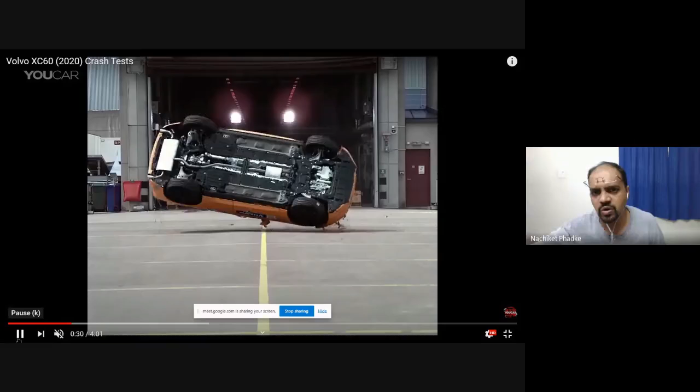Now let's go ahead. I'll just create some interest in you guys. This is a slow-mo, and see what is happening inside. Okay. So very little deformation whenever it touches ground. And this is like three times it is getting rolled over. It's not just one time. So it is not getting deformed. It is rolling over, and the occupants are safe.

Can you see this? It's just juggling around, and they are having their seat belts on, and occupants are safe. So even if it lands on its head, it's still intact. That is how strong it is. That is where the biggest strength of Volvo lies. Okay, so there are some bruises here and there. Some things are deforming. The door mirror is coming off, and there are a few things happening. May not be structural. The headlight is gone, burst. Everything is happening, but inside it is not particularly dangerous. Okay, agree?

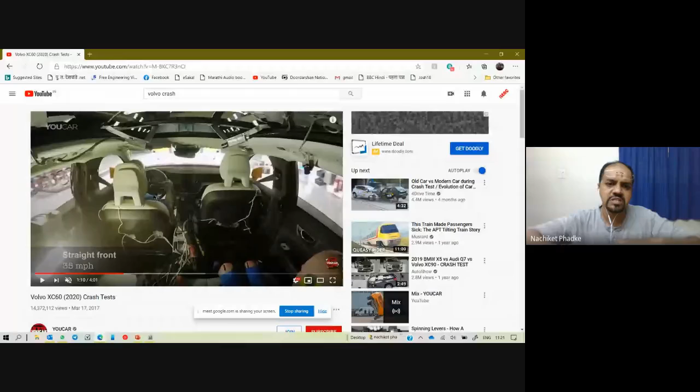Now let me just zoom out this window, and I'll just create another screen here. Okay. Now what do you have to watch here? This is a frontal impact, and it is a straight front. That means it is going to get hit directly onto a rigid wall with the full fascia in contact with the wall. There are going to be many types of frontal impacts. This is the least severe because the vehicle will absorb more energy. So now let's watch what is happening. Now I'll just explain in slow motion.

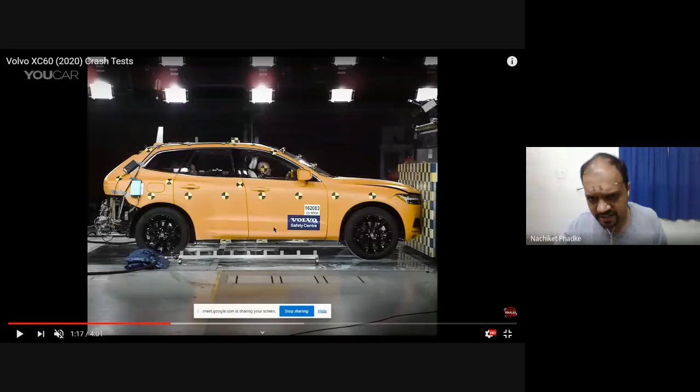Now the important aspect here, which you guys as mechanical and automobile engineers have to look at, is this particular test is a one-time test. Clear? Everyone understands that you are not supposed to drive a vehicle once it is in a frontal crash or a rollover. You are supposed to tow it away. The second aspect is this may happen with one car. So you're not going to meet it with another car. You may just directly hit a wall or a tree or somewhere else when you are driving alone. That is all possible.

Now, the important aspect here is the occupant should be safe. That's one part. The second part is there should be enough strength in this particular zone. You can see this particular zone. There has to be enough strength in this zone so that the door should open. After impact, the hinges, we all know hinges are going to be here, correct? So after impact, the hinges should be intact. If hinges are not coaxial, the door will not open.

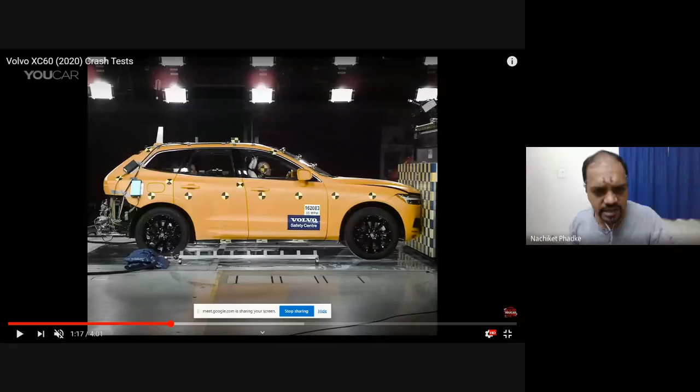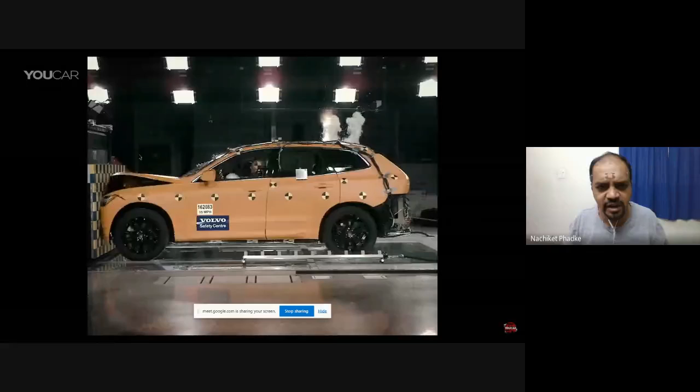Can you see this? It's tremendously steady. It is tremendously stiff. And that is why everyone says that Volvos are safe, with 5-star safety. Okay. It is tremendously safe. You can see the speed. You can understand what will happen at this speed in a Maruti, for example. I'm a pretty bad critic of Maruti cars because they are just crap for sure.

Okay, so this is what safety is, vehicle safety. It has to be taken seriously because accidents can happen with your mistake or without your mistake. It can be somebody else's mistake, but accidents are always going to happen.

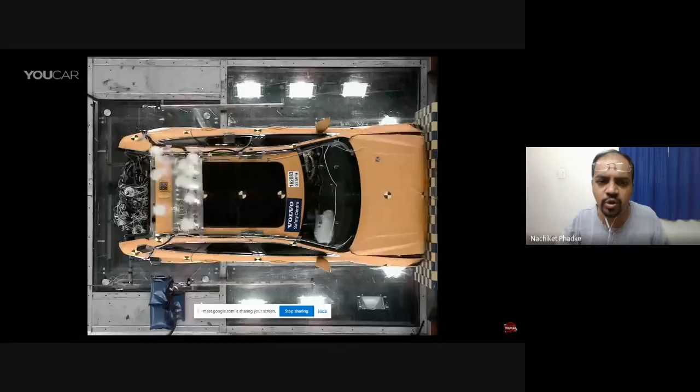Okay, so here you can see the accelerometers. There are going to be sensors, and they're measuring many things: what happens to the engine, what happens to the drivetrain, what happens to the non-structural elements, what happens to the wheel, what happens to the front bumper. All these things they are going to understand. Even the windshield takes a lot of load. The windshield also absorbs a lot of load.

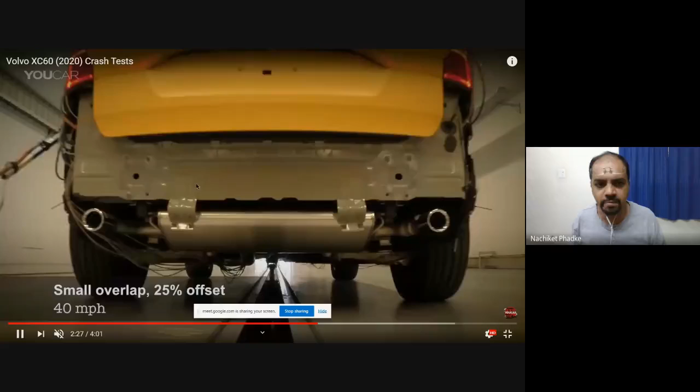Clear? So we talked about two types of dynamic analysis. So now this is the word which you have to write: dynamic analysis or dynamic load. So write it down in your notebook. Definition of a dynamic load. Through this video we are supposed to learn something.

Dynamic load. The definition of dynamic load is very simple. Let me write it down for you guys in a presentation. This is my company presentation, but for you guys I have converted it into training material. What is a dynamic load? By definition it is very, very simple. All of you understand strength of materials and design of machine elements. You guys are from third year or final year engineering background, right?

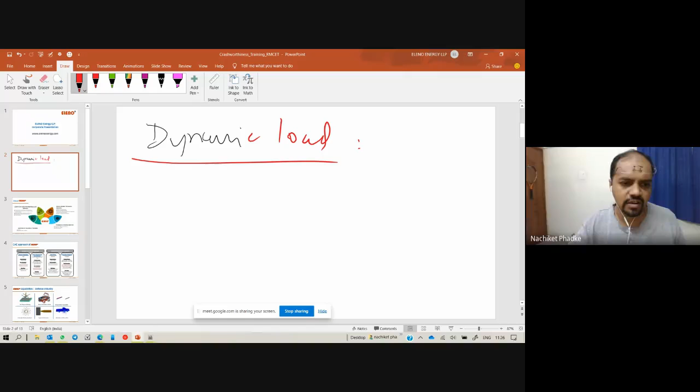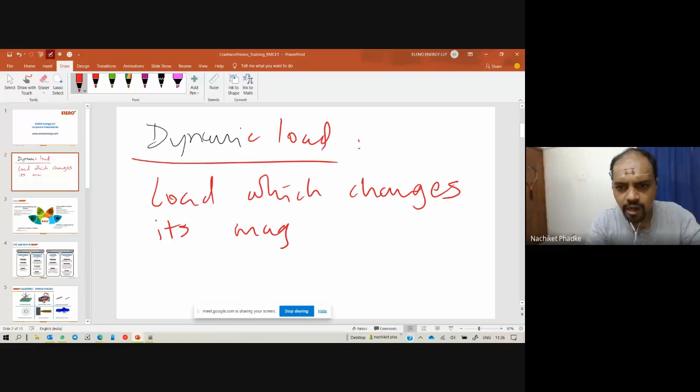So a dynamic load is a load which changes its magnitude and/or direction with respect to time.

Can you write this down, guys? Definition of a dynamic load. Once you are done writing, type done in the chat box quickly. Load which changes its magnitude and/or direction with respect to time. This is important for crashworthiness design. And we are also going to come to what the types of designs are.

Now, as you are understanding, type done once you are done writing. I want you to write it down. Don't take screenshots. I will share this presentation with you. Screenshots have no meaning. You will never go back to a screenshot and learn from it, but you will always learn from your books, because it's your own writing.

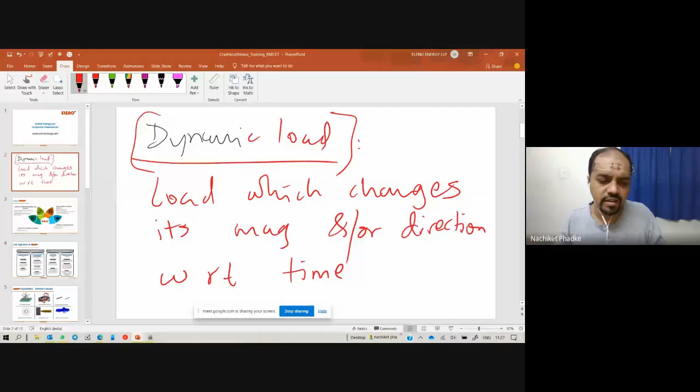Okay, so write down what a dynamic load is. It is nothing but a load which changes its magnitude and/or direction with respect to time. Understood? Now let's understand through a simple example what exactly a dynamic load is. I'll take a very simple example for you guys.

Let's imagine you have a shaft. The shaft is supported in bearings, so it is a fixed type of beam support, correct? When the shaft is in the bearing, it is a fixed type of beam. It is not a cantilever beam, it is not a simply supported beam, because bearings are supposed to carry bending moment. So there is going to be a maximum bending moment at the support.

There is no resistance to the shaft; it is freely rotating about itself. No resistance, no torque, nothing. And I attach a pulley on this freely rotating shaft with a mass of, let's say, 300 kilograms. So the mass of this pulley is 300 kilograms.

It is a perfectly balanced pulley, nothing imbalanced in this, and we are having rotation at, let's say, I'll not say omega, but let's imagine it is rotating at 3000 rpm without any load. So how are you going to analyze this shaft? It's a pure static load. Am I right, guys? It is a pure static load, because load is not changing its direction, it is not changing its magnitude. The magnitude is 300 kilogram multiplied by 9.81. That's the magnitude of force, and direction is downward, so it is not changing direction, not changing magnitude. That's why we can call it a static load.

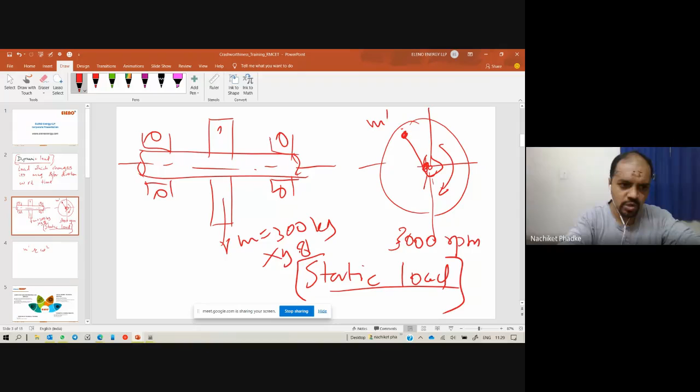Now if we apply some kind of an imbalance here, which is m dash on this pulley somewhere here, this imbalance is going to create what? M dash r omega square, correct? So there will be an imbalance here, which is m dash r omega square. This r is going to be the radius between center and the mass. That's the distance we are going to measure. And what is happening? This is constant because m dash you are not changing, but the direction of load is continuously changing. It is continuously alternating, right?

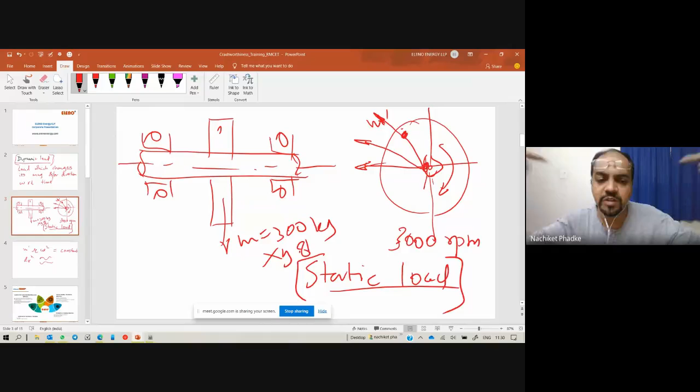So what is happening to the bearing? Once it is going to get pulled in this direction, the other time it is going to get pulled in the other direction, and so on. So there is going to be a continuous centrifugal force which is going to pull the bearing in all directions as time changes. And this is something which we'll be calling a dynamic load, because it is not changing magnitude, but as per definition it is changing direction.

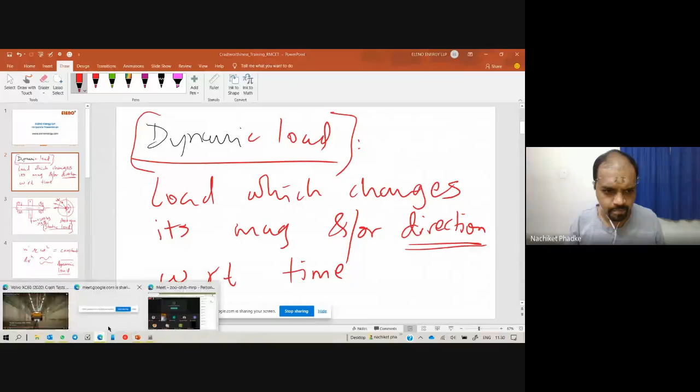Are you clear with this particular example, guys? Type in clear if you are clear with this example, so that I understand. Or if you have questions, just type in the message box. Okay, Suraj says clear, Chinmay says clear, Prathamesh says clear, Aniket says clear.

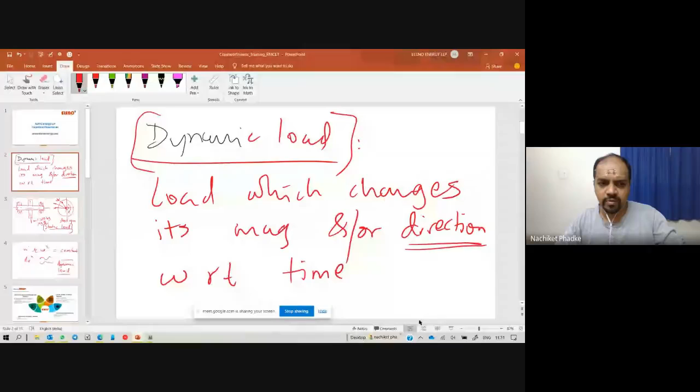Clear about the dynamic loading concept. So a load that changes its direction or magnitude with respect to time will be called a dynamic load. There are going to be 4 types of dynamic loads in industry. I'm going to talk you through the dynamic load in the industry with 4 domains. The first domain is what we are discussing today, crashworthiness. That's the first domain. The second domain is impact.

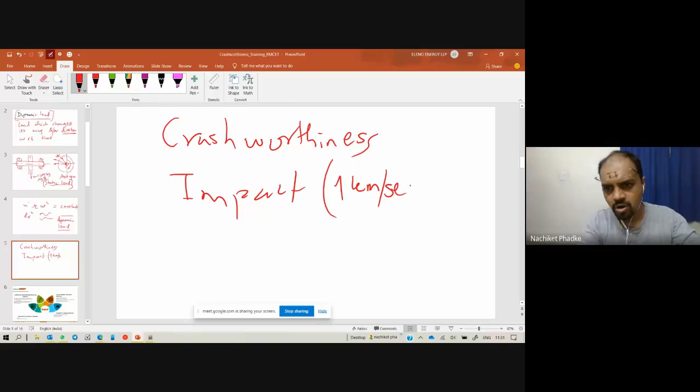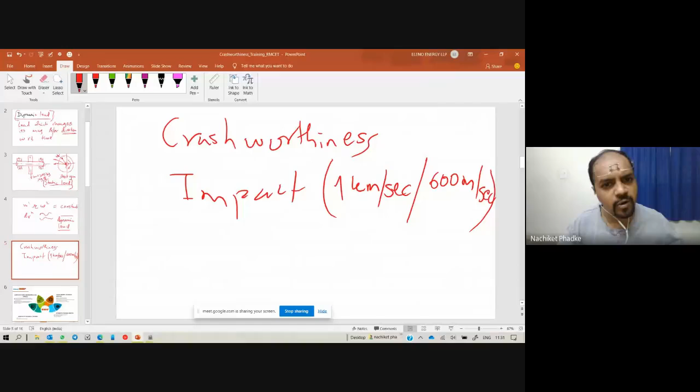When I say impact, it is at, let's say, 1 kilometer per second or 600 meter per second. I'm talking about high speed impact in the event of explosives, missiles, bullets. I'm talking about defense. So first of all, we are talking about automotive. The second thing we are talking about is defense. We are talking about domains.

The third type of application for explicit dynamic analysis is drop test for household equipment. So let's imagine a hair dryer, mobile phone, this mouse, this digital pen, or household equipment that may get dropped in transportation, like washing machines, dishwashers, or microwave ovens. They go under drop test. Everyone, Samsung, LG, Whirlpool, uses LS-Dyna for their drop test analysis, impact analysis or G loading analysis.

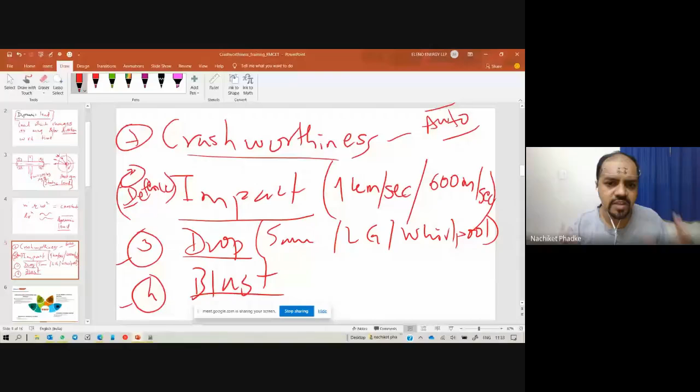And the fourth type is blast, which is a shockwave propagation phenomenon, happens in a millisecond, 1, 2, 3 milliseconds, it's all done. So this is what is causing us to actually understand the explicit dynamic domain. There is a tremendous shortage of resources for crashworthiness, for impact, for drop, and for blast. Take my word. There is a tremendous engineering talent shortage.

Engineers are talented, but they are not having skills. They may be having skills, but they are not aligned to the product. They may be aligned to the product, but they are not having exposure to the software tools. All these things are causing a lot of problems in the industry. There are tremendous opportunities, but we are not able to cater. Reason being, we are not good in the basics of engineering. That is the first reason. The second reason is we are not getting exposed to the newest technology. And the third reason is we are not focusing ourselves on a specific niche. The word is niche.

This is analogous to specialists, super specialists in the medical domain. If you go to any medical field, there are going to be super specialty hospitals. So if there is a problem which is very intricate, very detailed, you need a super specialist to solve that problem. That is something we all should strive for. And my next point about this is subject matter technical expert as your goal.

Okay, imagine. So let's talk about this. I will give you time to ask questions. Let's talk about this in 1 minute, and then you can ask me questions.

Subject matter technical expert. What is it? Who is this guy? This guy is a go-to guy who is going to solve your problem in a specific matter, in a specific subject, not a generalist. Okay, not a general practitioner. He is a super specialist in a particular subject. So you cannot be a super specialist in first year, second year, third year, even 5th, 6th, 10 years.

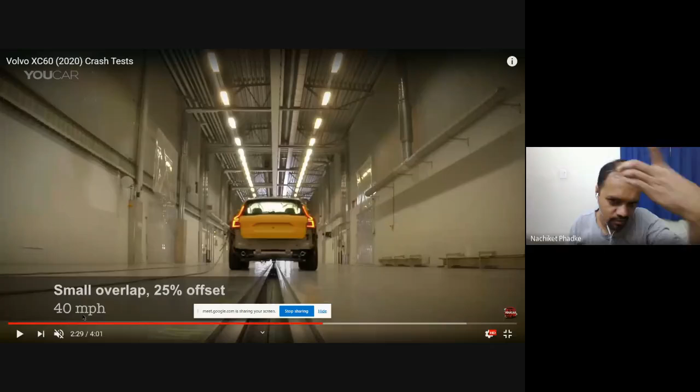I will read out. This is a small overlap, 25% offset at 40 miles per hour. So 40 miles per hour is 64 kilometers per hour impact. Okay, so 1.6 kilometers is 1 mile. So this is almost 64 kilometers per hour impact. Okay, and this is a small overlap. Small overlap is worst. Worst in the sense, you have a driver side.

Let's say you are a driver, and there is going to be oncoming traffic, and this is a top view. This is a full head-on collision. This is not very severe, okay, because the other car is also going to absorb energy. This is 40% offset, and this is 25% offset. You can see my hands, right? So this 25% offset leads to severe injuries.

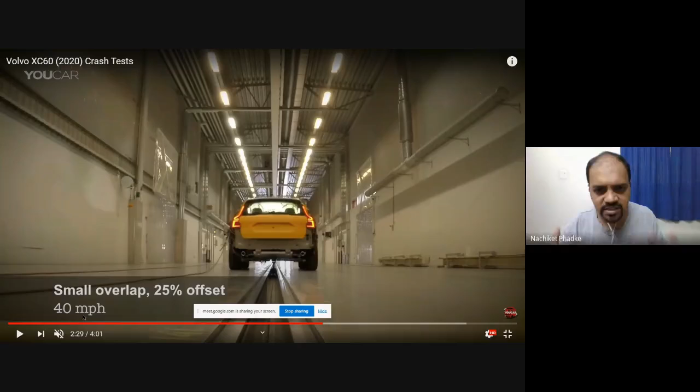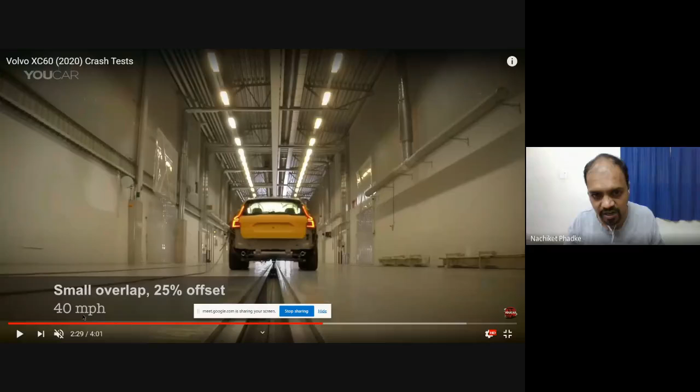There are going to be cases where the dead body could not actually be extracted out of the car. You have to cut the car altogether, and then you have to extract the dead body. That's the severity of a frontal impact. Okay, so let's see what is happening with a small overlap. Okay, this is called a sled, and you can see what is happening.

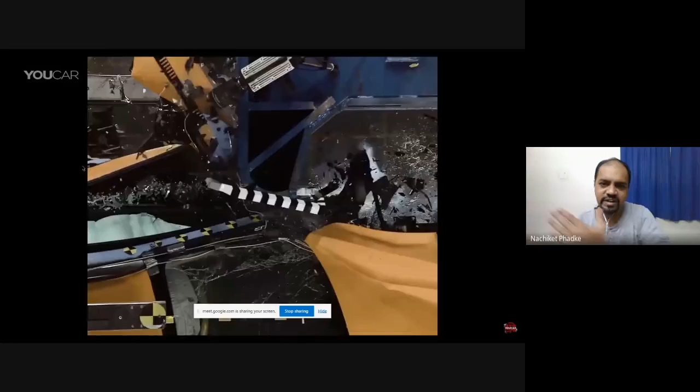It's a rigid impact, and can you see this? It's like the vehicle flowing as a fluid, and it is getting away from the barrier. Now let's see the top view. Let's see the occupant. What happens to the occupant? Can you see the A pillar, guys? It's not deforming much. There is a good amount of occupant space, and this is Volvo.

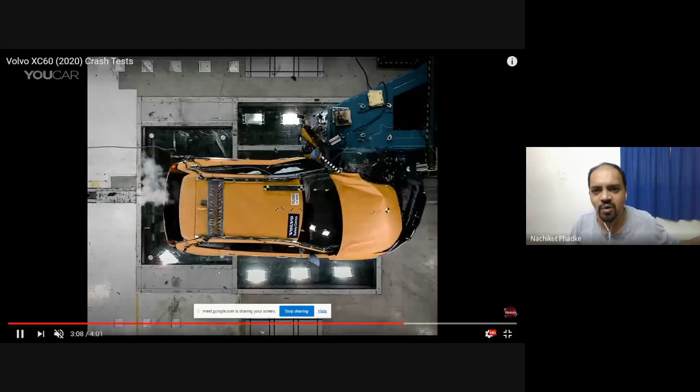Okay, so there has to be an occupant. The front wheel had just sheared off. It's out of its way. Can you see this? The wheel is not there. It just came out. Only 3 wheels are there. The 4th wheel is not there. And okay, so I will replay the last 5 seconds. You have to watch for the seat belt. Guys, be careful and watch what happens to the seat belt. It automatically gets pulled. Okay, that is called a pre-tensioner. So watch it carefully.

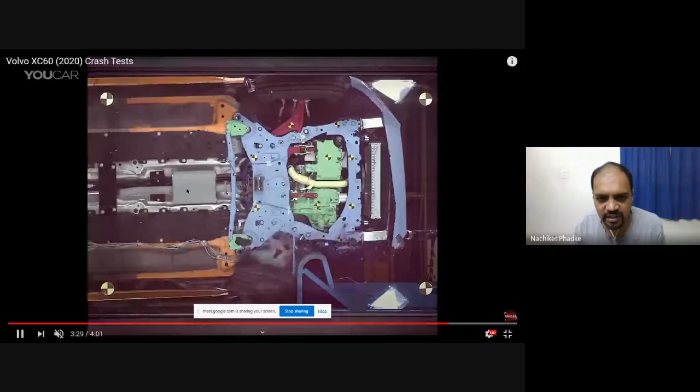Yes, can you see this? I'll play it again. Watch it carefully. The belt gets pulled, and that is to make sure the occupant is not moving around. The occupant is exactly in the position the vehicle wants it to be for a frontal impact. Okay, and the wheel sheared off, everything sheared off, no structure is able to withstand the load, and the vehicle just flows, and it is still stable.

Nothing happening. Can you see the amount of forces coming on the A pillar? The A pillar is so thick. So I will give you a very, very important assignment. Guys, are you listening to me? Type in L if you are listening to me. You have to go on road and write down the assignment.

Okay, the safest cars in India right now, there are 3 cars, I will say 5-star rated Global NCAP cars. The first at the top is the Mahindra XUV 300. The second 5-star car is Tata Nexon, and the third 5-star car is Tata Altroz. No other car is 5-star. Okay, so these 3 are the homegrown 5-star cars.

Now you have to differentiate by looking at the A pillars of any Maruti car. Okay, any Maruti or Toyota vehicle, the A pillar is what we saw near the driver, and see these 5-star rated cars, maybe XUV 300 or Nexon. Look at the A pillars of these 2 cars.

Okay, the 5-star cars, you will feel the difference by just looking at it. There will be a tremendous chunk of A pillars in front of you, and the reason is this test, the test which we saw right now. Small overlap, because this is a global NCAP test. This is a 25% offset at 64 km/h. Passenger should have no injury at all. That's the test, and that's why the vehicle is designed according to the test which it is going to undergo.

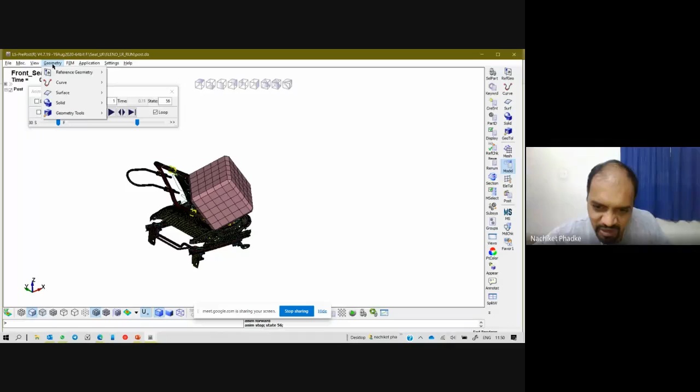What you can do using LS-PrePost: you can create geometry, very simple geometry. Okay, I'm not talking about a CAD tool, very simple geometry. You can open IGS and STEP files for free, and you can mesh those IGS and STEP files for free. So you can do meshing using LS-PrePost for free. You don't need any licensing, nothing. Clear, guys? Can you do that?

So I'm giving you a lot of things. You have to be very, very busy with your pen and paper. Okay, so LS-PrePost, that is what you have to search for. Can you do that? So search for that, and later you can actually see it or actually use it.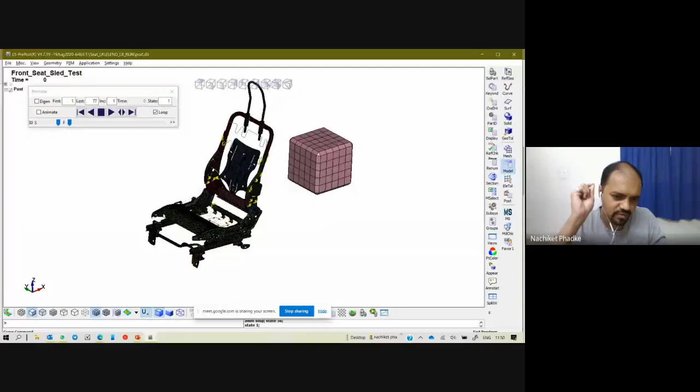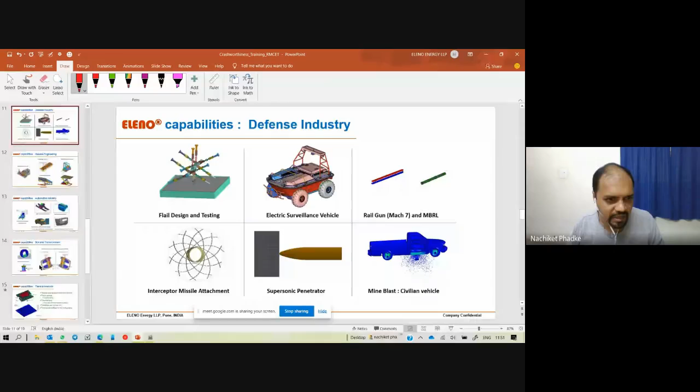Fine. Now let's understand, with regards to this particular presentation, the applications of crashworthiness, the applications of the explicit dynamic domain. So I will just show you some applications right now. Let me check if I have another presentation. Yeah, okay, so this is a bus rollover presentation. I just wanted to show you some animations, but anyway, I will show you an animation here.

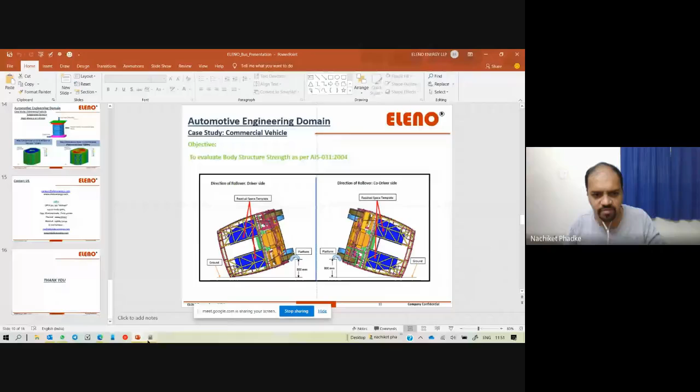Yes, so you can see a vehicle seat. This is a car seat. This is not any company seat. This is from GrabCAD. You all know GrabCAD, right? I'll just type in GrabCAD in the comment box, and I think it will be easy for you to check. Okay, I've just put the name, grabcad.com. It's a free site where freelancers upload their designs, and you can download them for free.

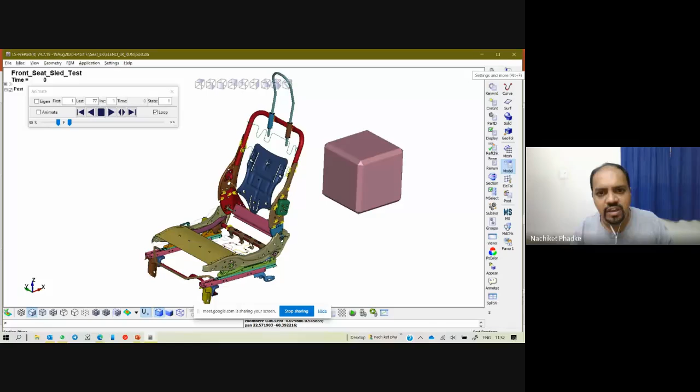So this seat is not any company seat. I'm not allowed to show any company presentations or company designs here. This is a free seat available on GrabCAD. What we did is we meshed this seat using nodes and elements. So you can see it here. Can you see this? You can see the meshing.

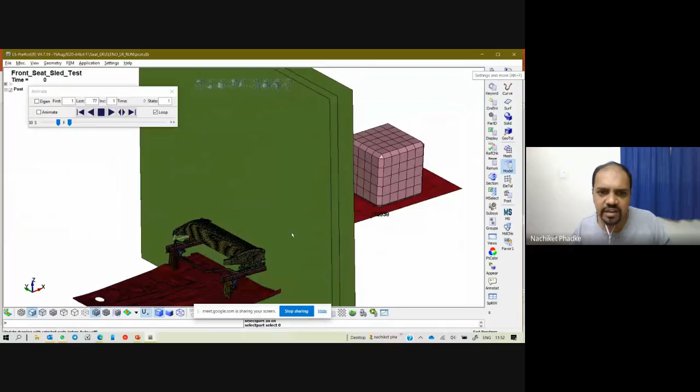There are many holes available. This is a track. There are connections. There are wires being defined. There is connectivity done. This is a plastic panel. This is a head restraint rod. This is a luggage block. So I'll just show you what it is. What is this test? This test is called the luggage retention test.

Can you write it down? I will also write it here. The name of the test is luggage retention test, LR, and it is as per ECE, that is Economic Commission of Europe, ECE regulation R17. You can search this regulation. This regulation is available free of cost to everyone.

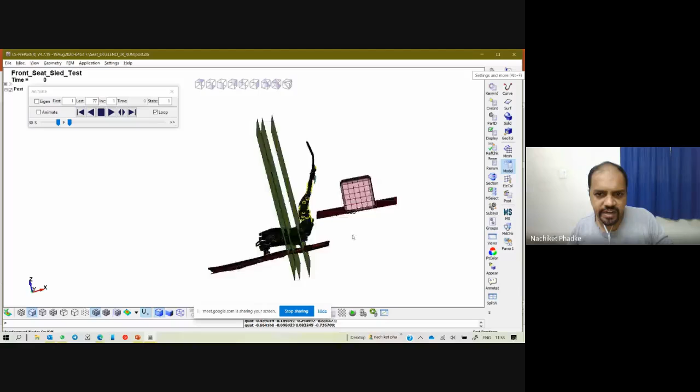So this luggage retention test is also called frontal impact unladen. Unladen means nobody is sitting in the seat and still we are doing a test. So what is happening in this test? There is a luggage block. The block is not moving. The block is stationary. It's a frontal impact. That means the vehicle is moving forward and there is a resistance to moving further. So the vehicle will move in a rearward direction when there is an impact.

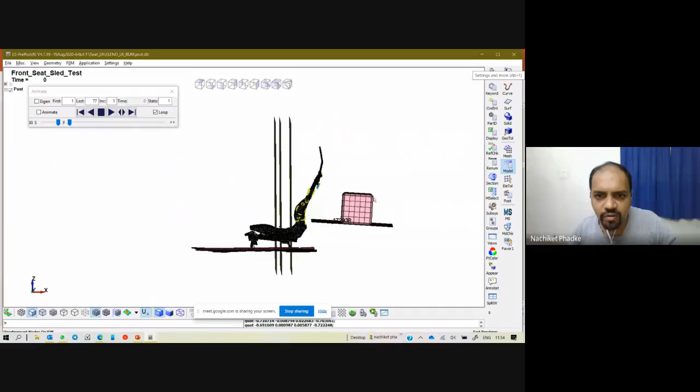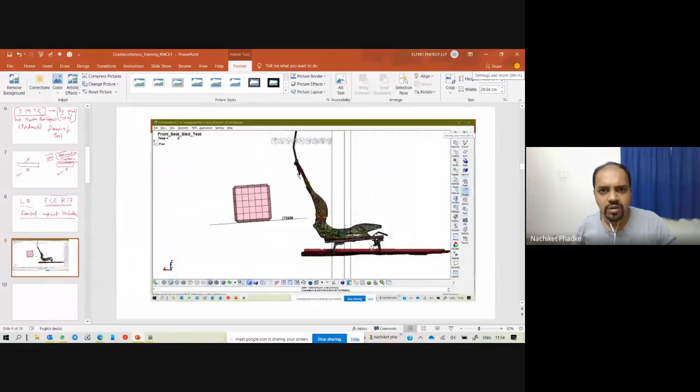And because the luggage is not part of, so I'll just annotate. Annotations are not available. One second, I will just do a print screen and put it here. I'll put it in this presentation, which I will share with you. Don't worry. Okay, so if this is a seat, what I can annotate is that this luggage is not part of the vehicle.

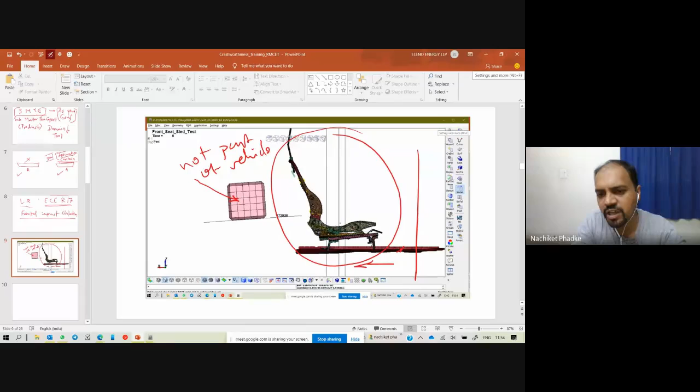Not part of vehicle. This is an independent entity. This complete seat is a part of vehicle, including this floor, BIW floor. So what is happening in a frontal impact? Vehicle will move in a rearward direction after the impact or in the impact, not when it is moving. So it is moving and it hits, and once it hits, it's going to rebound. So we are talking about only the crash scenario, not pre-crash.

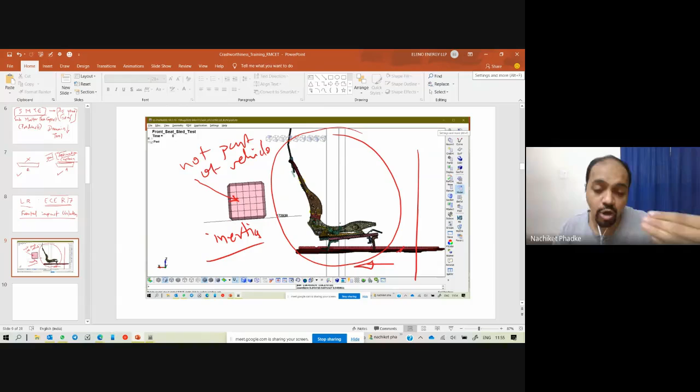So this is going to happen and vehicle is going to move in a rearward direction, but because of inertia, luggage will try to remain stationary. Am I right? Simple physics. Luggage will try to remain at rest. It will try to keep on moving with the same velocity. Am I right? And the vehicle will move in a rearward direction, which is going to create a havoc situation.

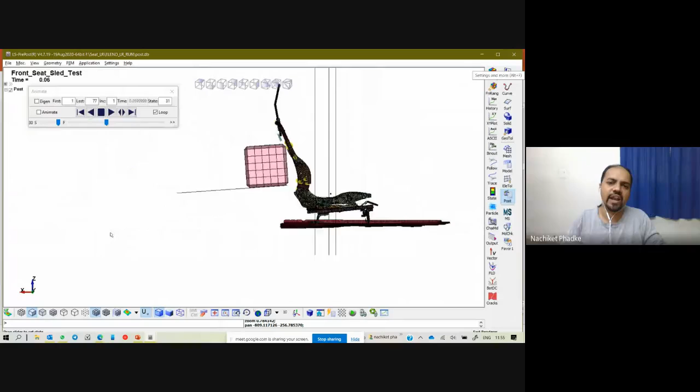I will just show you how it is. So if I just go for animation player and run it, this is the other way around. I will just remove the anchor point. So follow point I'm going to reset. Yep. So this is what is going to happen. The vehicle will move in a rearward direction and luggage will try to remain stationary. This is called as a luggage retention test. This is highly dynamic, non-linear, explicit scenario. I'll just slow it down for you guys to understand what is happening.

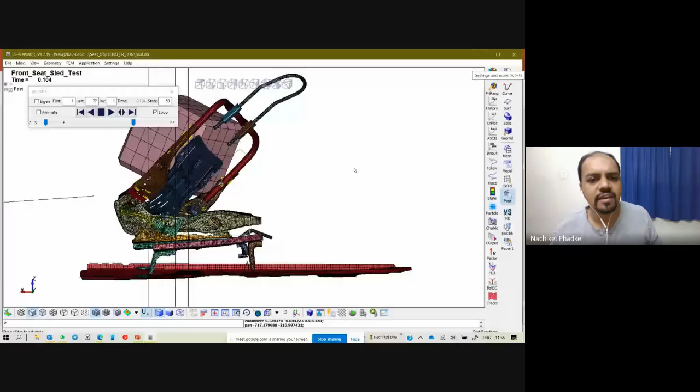This luggage is of some 18 kilogram and it is 300 by 300 by 300 cube, and this luggage is going to hit on the seat back, and there is going to be tremendous amount of deformation if the seat is not particularly stiff. So we saw in our first session what happens to an overall vehicle. Now what we are looking at is what happens to this particular seat. Getting my point? And this is very, very, very important.

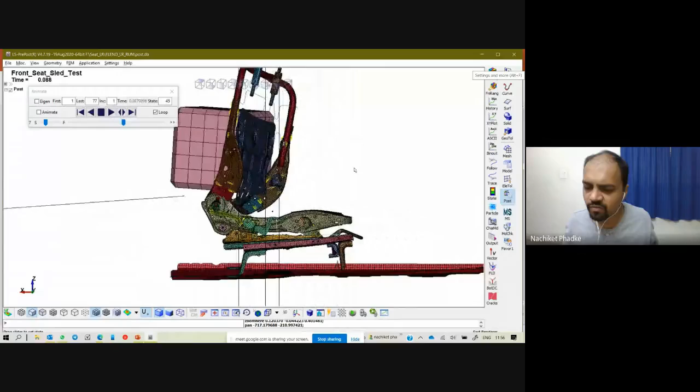Very important. Clear? So this is something which we do using explicit dynamic analysis in LS-Dyna. This is what we do in LS-Dyna. This is what we strive for in LS-Dyna. Making sense? So this is the luggage retention test. Have you understood the physics of this test? Type in LR if you have understood physics of this test. Don't worry about the tool. It doesn't matter. So if you have understood physics, type in LR.

Okay, so Mayur says LR, Srinath says LR. Good. Vinay, Pratik, Atharva, Shubham, Chaitanya. Good. Thanks a lot, guys.

So it is about conservation of momentum. Law of conservation of momentum. That is what it is. MV equal to MV. The law of conservation of momentum is going to play a very, very important role in absorbing the energy. And this is called as explicit dynamic non-linear analysis. So shall I write it down, guys? It is called as explicit dynamic non-linear analysis. Explicit dynamic non-linear analysis. And this is done using LS-Dyna.

This can be done using PAM-Crash. This can be done using Abaqus Explicit, and this can be done using Radioss. Out of it, the market share is 95% for LS-Dyna. All these three are just 5%. That's why I teach or learn LS-Dyna continuously. So LS-Dyna is for our company, for defense projects and railways project. For our company, LS-Dyna is the single solver.

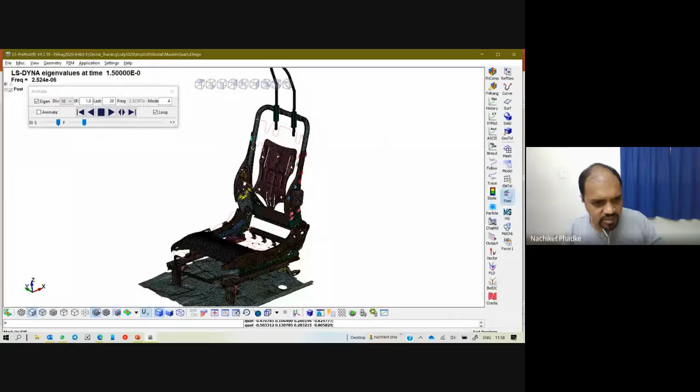I will show you another application of LS-Dyna for modal analysis, that is frequency response analysis. So there is no load here. This is just a seat connected to each other. The first 6 modes are going to be 0. You can watch this value. This value is minus 8.17 times 10 to the power minus 6. So it's close to 0. That is in terms of hertz. So the first frequency is 0, and you can see what is happening.

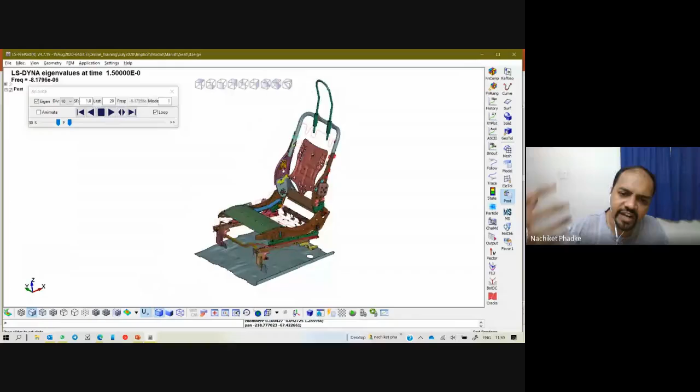This is a natural frequency. So natural frequency for unconstrained object is always going to be 0 because it's like in space. So the natural frequency is square root of k by m. You all know that. You have to be very, very clear with basics.

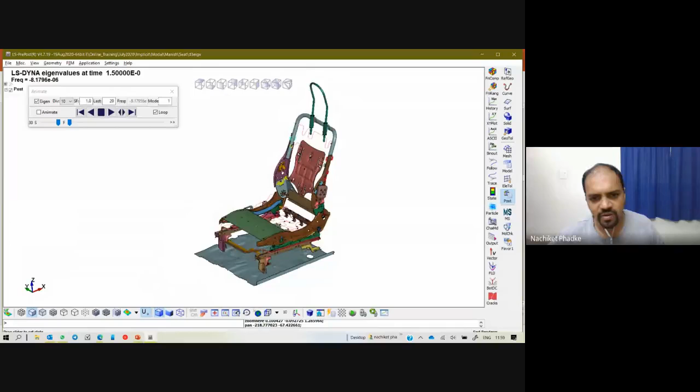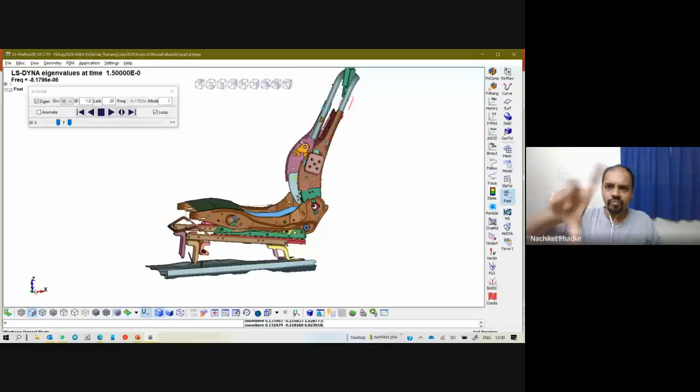So basically this is first mode. Now let's watch what is happening to the second mode. So this is rotational mode. Can you see this, guys? It's rotational mode about y-axis. The complete seat is rotating about y-axis. So we can call it as RY. The next mode. This mode looks like rotation about x-axis. Let's see whether it is pure rotation or translation. This mode is either rotation about z or translation about y.

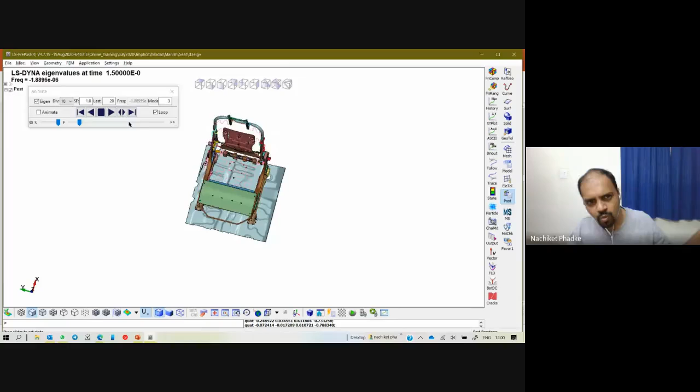Okay, we'll figure it out. Then you have another mode here. You can clearly see this is a rotation about y. So earlier was translation. This is also kind of a rotation, and this is also kind of a translation. So you can distinguish between various modes. These all are zero modes, zero frequency modes, which are also called rigid body motion.

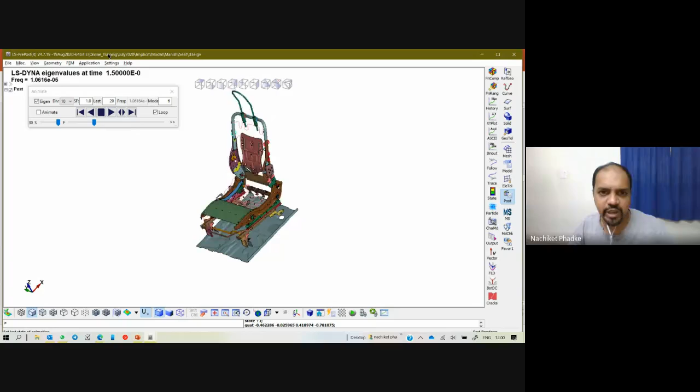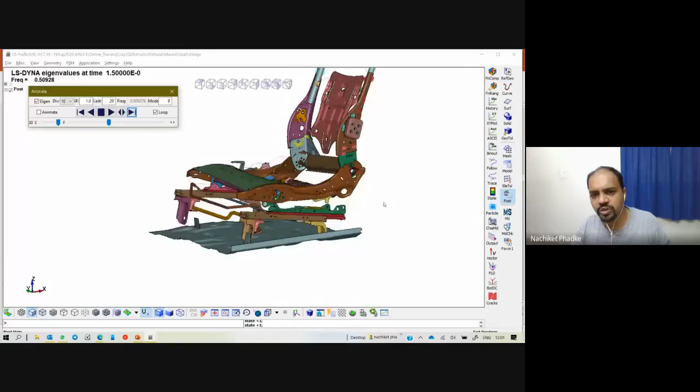So in your dynamic subject, when there will be vibration and balancing and all these things, you will be looking at this particular topic. And now the 7th mode is something which is a local mode. These two parts are not connected to each other. That's why you can see the motion like this. These parts are not connected to each other, this area, whereas this area is connected. So it is moving according to the connection, and this is not moving according to the connection.

Are you clear, guys? So type in modal if you are clear with the frequency analysis. This is a natural frequency analysis, not an excitation frequency. First 6 modes are 0, and next modes are going to be something which can be caused by constraints, or not constraints.

Okay, so type in modal if you have understood what it is. I will give you a sufficient amount of time to think about it and come up with the question. I will be happy to answer it. If not, keep the question with you and I will try to answer your question in subsequent videos, or maybe we'll have a separate interaction for BE students for their dynamic analysis subject. Clear? Interesting? Are you learning something? Type in learning if you are learning something.

Okay, just 5 minutes, but you are learning something, right? Shubham Pagade, you are learning something. You should be waking up, sitting straight. Don't lie down. You are not a Shesha Vishnu to lie down. Just wake up. It's for you, not for me. Okay, good. Thanks a lot, guys. You are learning something, that matters most to me.

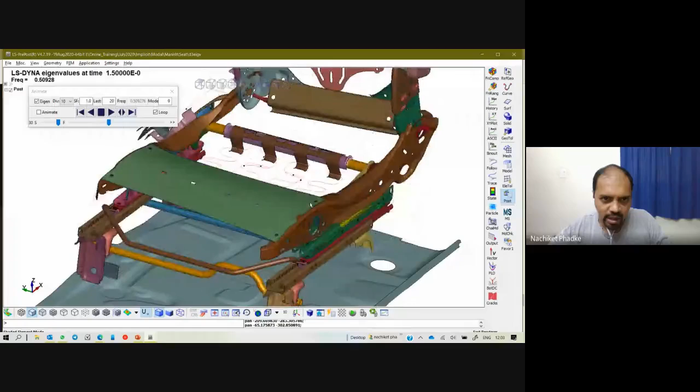Okay. Now we will understand what happens in vehicle design. We are going to talk about what is the vehicle design principle for crash, or why we use crashworthiness to design the vehicle, the important learning topic for today's session. We are coming to an end. Only this topic remaining: crashworthiness. Before we go to crashworthiness design, we should understand types of designs.

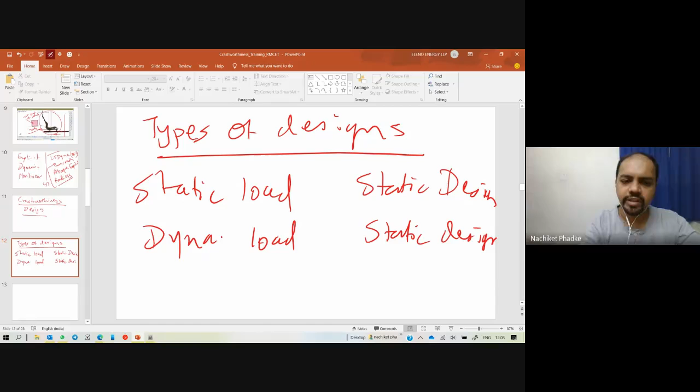The types of designs are static load, static design; dynamic load, static design; and dynamic load, dynamic design. These are the three principles of design for any structural problem. Static load, static design is you designing a chair, a table, something like a water tank or a structure, skeleton. All these things are coming as static load, static design.

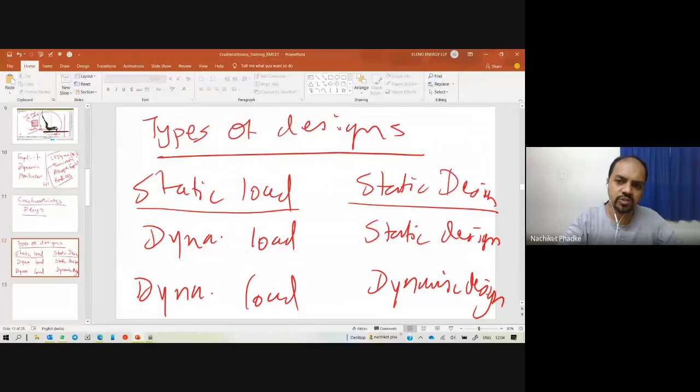Your load is also static. It is not changing its magnitude and or direction with respect to time. And your design is also static. You are using simple principles, sigma is equal to P by A, simple geometries. The second part is dynamic load, static design, where the important aspect is dynamic load, because your principles remain the same: simple principles of sigma equals P by A. Dynamic load is load which changes its magnitude and or direction with respect to time.

So it can be bridges. One time a bus is crossing the bridge. Other time you will be crossing the bridge with a four-wheeler, a simple car. The other time with a JCB. So what is happening? The magnitude is continuously changing. Direction remains downward always for a bridge, but it is a dynamic load.

But what we do, we convert this to an equivalent static load, and there you use static design principles. You will have a factor of safety of 10, plus some additional conversion factor for dynamic to static, and you design it using simple static principles. Whereas dynamic load and dynamic design is completely different. You cannot use simple arithmetic for dynamic load and dynamic design. You have to work using numerical methods and CAE.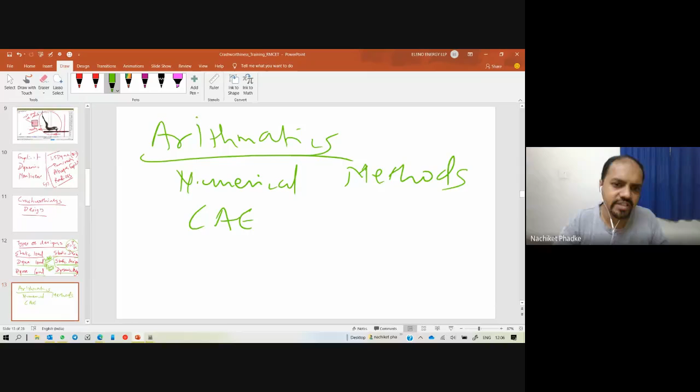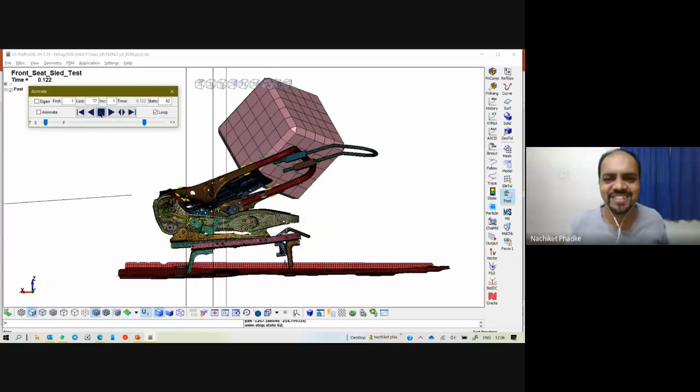Then only you will use numerical methods and CAE, of course. Numerical methods are part of CAE, or CAE is derived from numerical methods. So whatever kind of design you are looking at, this is a time domain. That means your abscissa is always going to be time, and in this particular case, applying simple principles of converting a dynamic load into an equivalent static load makes no sense, because you are never going to get similar results.

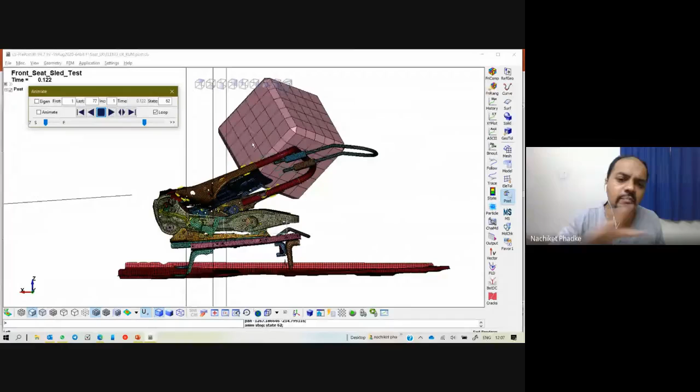So for example, if this block is 300 kilograms and it is moving at an acceleration of 20 g, mass into acceleration will create a force, correct? If you try to apply a static force equivalent to this dynamic load, you are never going to get similar results. You are going to get a completely different result in that aspect. Is this clear, guys?

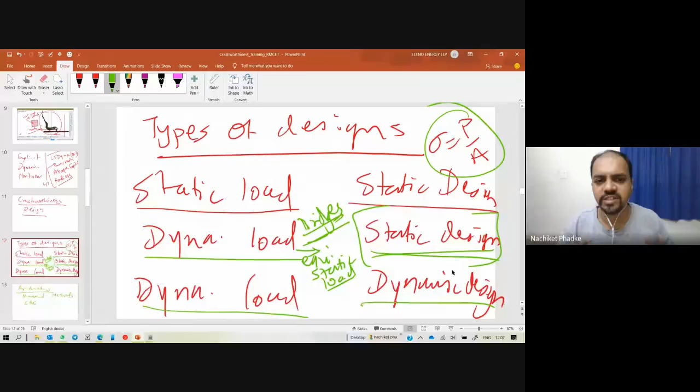So these three principles you have to watch for. That's why cars are always designed by taking into account dynamic load and dynamic design in practical application. Crash is dynamic load, dynamic design. Rollover is dynamic load, dynamic design. Impact is dynamic load, dynamic design. Blast is dynamic load, dynamic design.

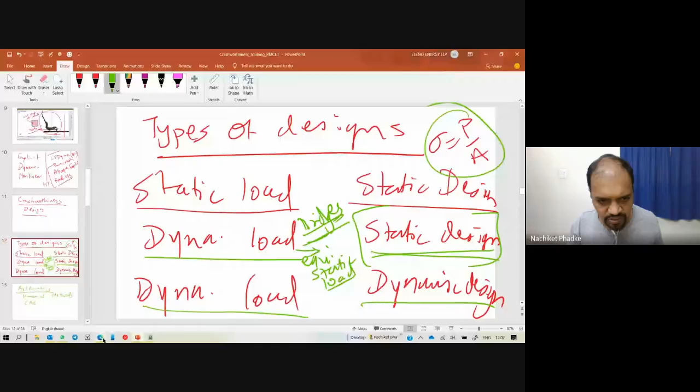Making sense? So up to this point, everything clear? Anyone has a question? Type in your question if you have. If not, just type in clear, so I will be assured that whatever I tried to teach you today was passed in a clear way. If you have a question, type in question. I'm looking at the comments now. Chinmay says clear, Pratik says clear, Sanket, Srinath, good. You learned something, right? Thanks a lot, guys.

Thanks for replies. Regarding a stationary body with a vehicle's front impact: you are not designing that body, you are designing for a vehicle crash. So basically it's a frontal impact, which means it's dynamic load, dynamic design for sure. But if you are designing that body, it is still dynamic load, dynamic design, because you are not supposed to just take an equivalent static load of that dynamic load. Your equivalent static load will never match the dynamic load.

What is the reason behind a car like Scorpio? Because they are not designed for safety. If you haven't designed this pen for a drop test, when you drop it, it is not going to work because your design was not that way. What was the design for previous phones with removable batteries? If you drop those phones, they just split apart, so energy gets diverted from important components, and you can put everything back and your mobile starts up. That's an energy balance principle. Very good question.